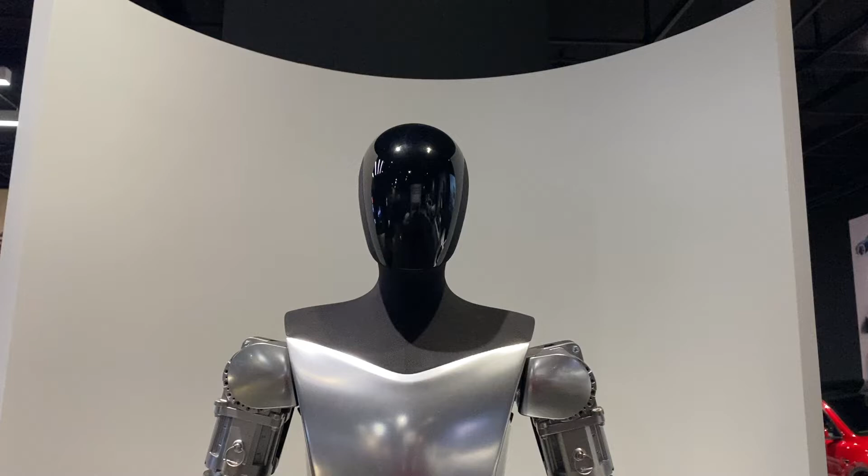When will they join the workforce, you may ask? Well, Elon has a lot to share, which will be covered here today for you.

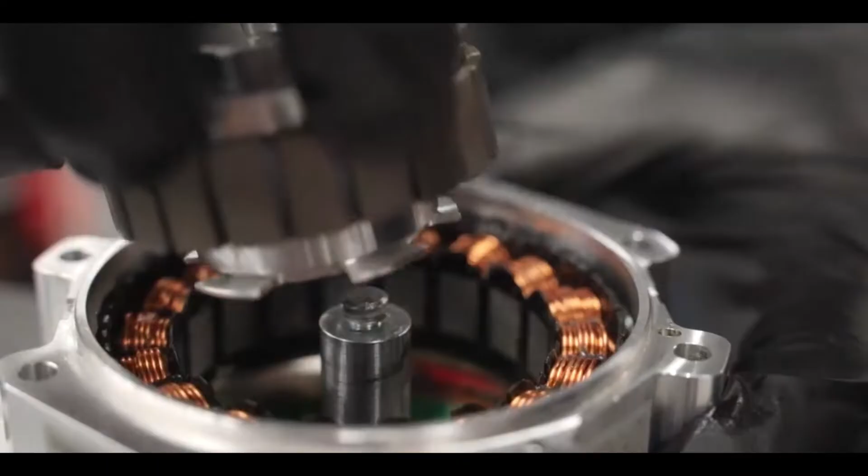Elon Musk was not shy about making bold claims on the capabilities of his Tesla bot humanoid robot. Chief among them being his belief that an economy driven by work droids will make possible a future with no poverty, a world of abundance where everyone can have everything they want in terms of products and services. This was to be a fundamental transformation of civilization, similar to the internet boom and later the 4-hour work week craze coined by Tim Ferriss. I think we can all agree that would be a change in a positive direction.

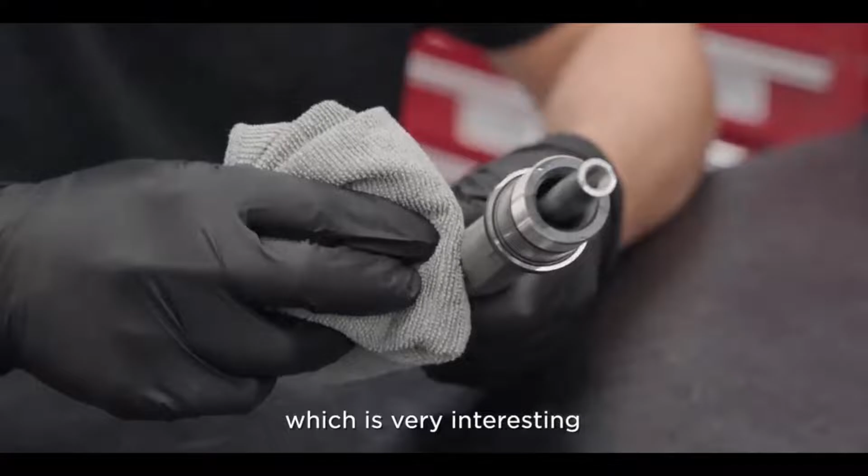The basic theory underlying this idea is that the size of the economy is determined by the number of productive entities multiplied by their productivity—more robots, more workers that don't need to rest, just a plug. So in order for the economy to grow perpetually, it would require equivalent growth in productivity and reproduction that robots don't suffer from. Elon's thought is if productivity is limitless, then the economy, by extension, will be as well. That sounds like wishful thinking, and it is, but Tesla is starting on the path toward that goal regardless.

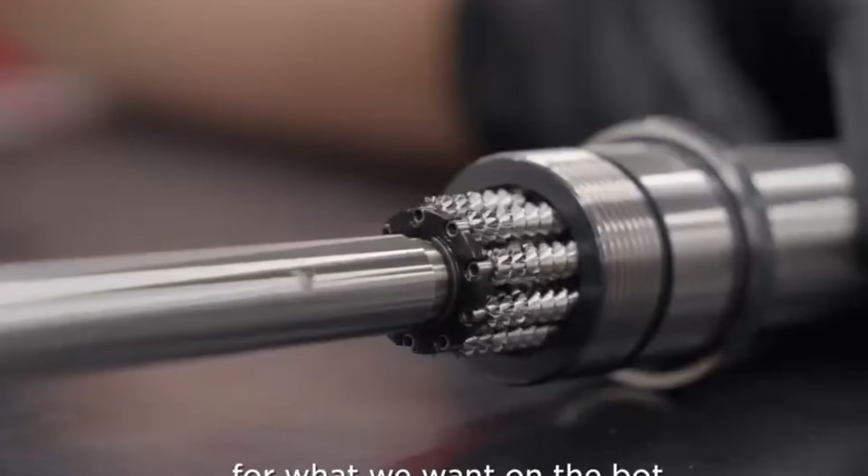So let's talk about how the Tesla bot is going to accomplish the most ambitious plan in history: adding humanoid robots to the workforce.

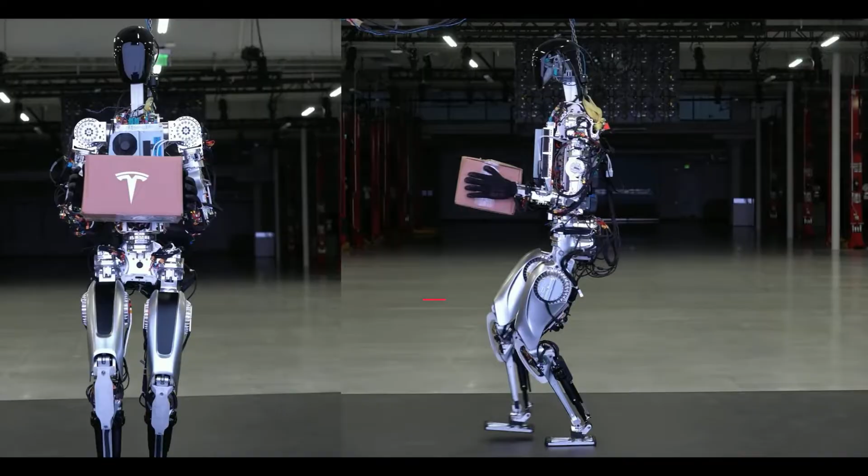Tesla AI Day 2022 brought us our first look at the functional Tesla bot—well, 2 of them really, or like 1.5. We did see a robot walk across the stage and do a little dance, but it was kind of janky looking. Tesla confirmed that this is simply their test candidate. They built a functional humanoid shaped robot with commonly available parts as quickly as possible so they would have a vehicle to start developing and testing their software.

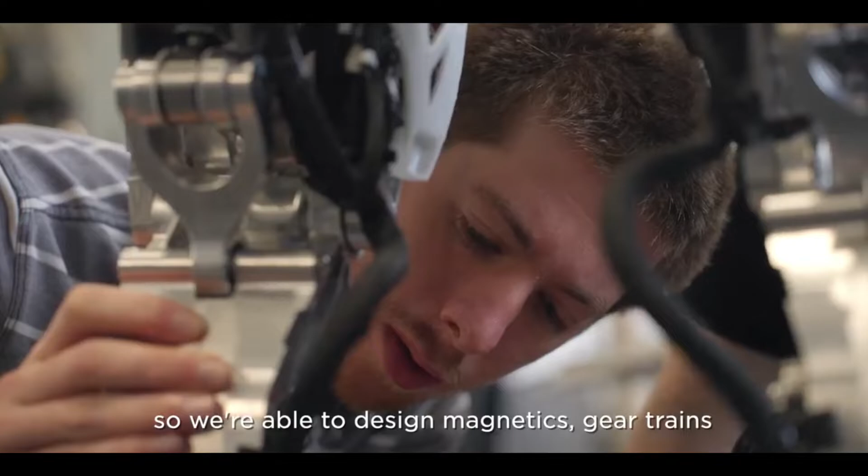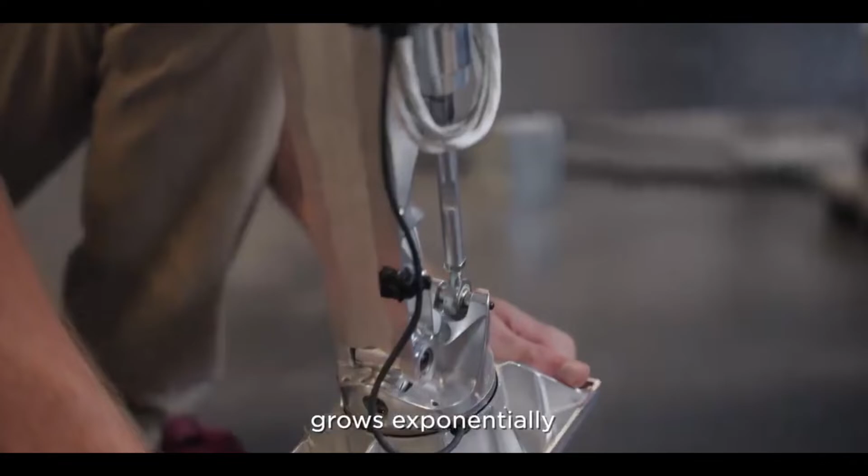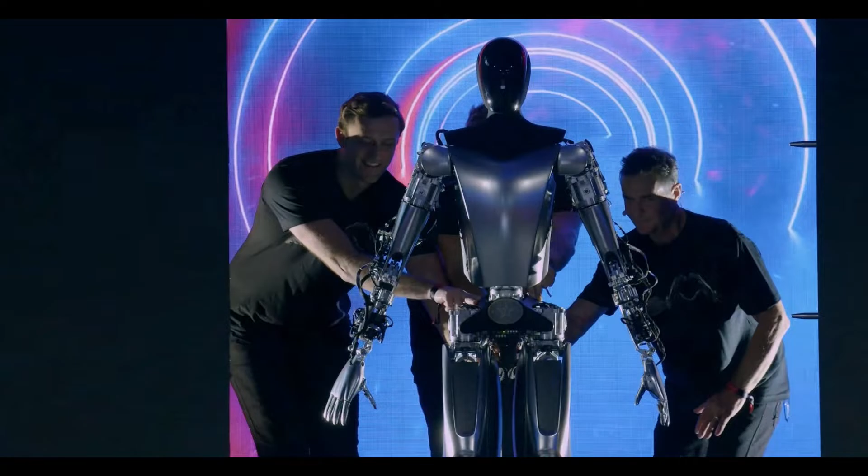The first prototype was nicknamed Bumble C, another Transformers reference, and an admission that this is not even a B-grade robot—it's a firm C. But this gives them something to work with while they put their efforts into the real deal. We do get a taste of the real Optimus at AI Day. It couldn't walk or barely even stand on its own, and it had very limited movement, but this one looked a lot better, and Elon confirmed it is pretty close to what the first production robot will look like.

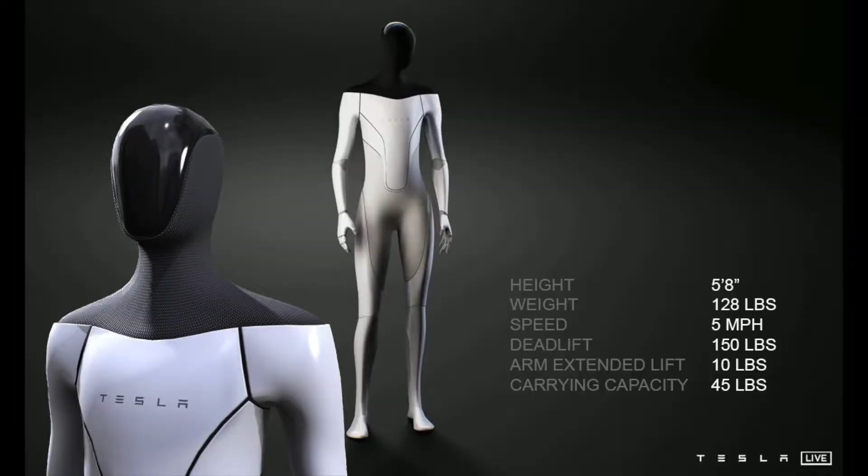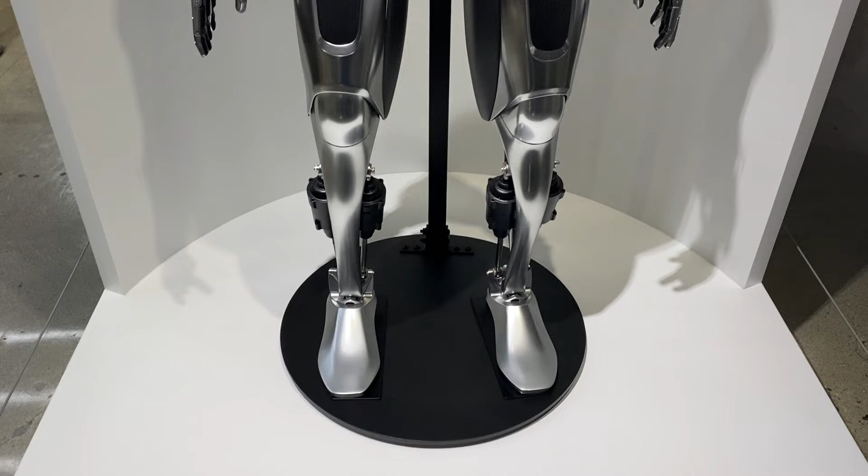The ultra slim design from the very first AI concept is gone, which was jokingly revealed in 2021 while everyone was still trying to get a grip on COVID-19's impact on the world. This new Optimus is chunky, and that's perfectly fine. It also seems unlikely that Tesla would fit a functional robot into such a slim frame. I think with the first robot concept, they were trying to stress the fact that this was not supposed to be dangerous or intimidating. Every aspect of the Tesla bot is designed for optimized cost and efficiency.

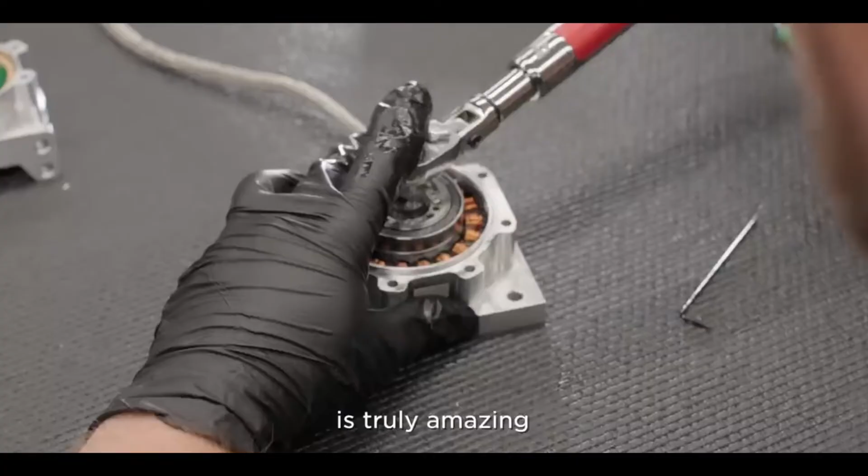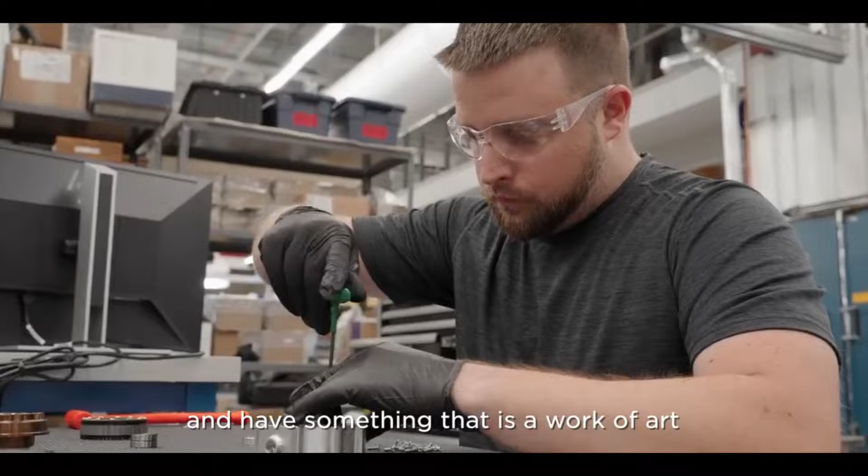This means reducing the part count and power consumption down to its bare minimum. The power source for the bot is a 2.3 kilowatt-hour Tesla battery pack, enough energy for a full day of activity. This is a fully integrated battery unit, so power distribution, cooling, and battery management are all integrated into the pack. This keeps the bulk of the weight right in the middle of the robot. Tesla is leveraging their existing products and supply chain to build this miniature battery pack.

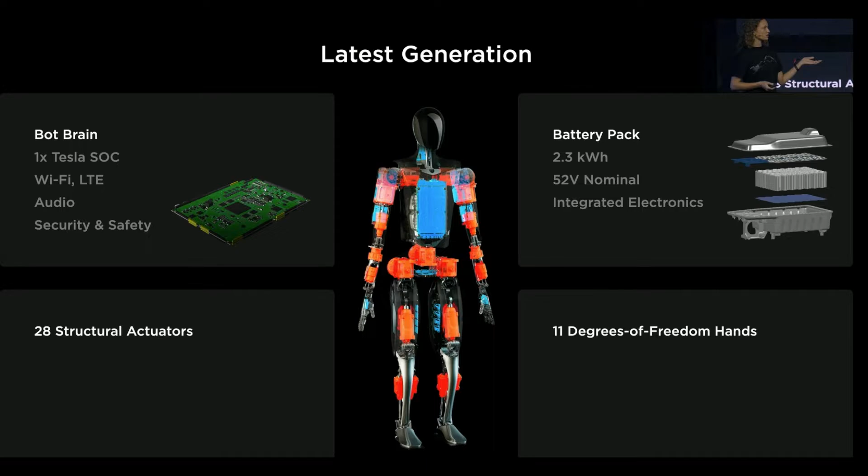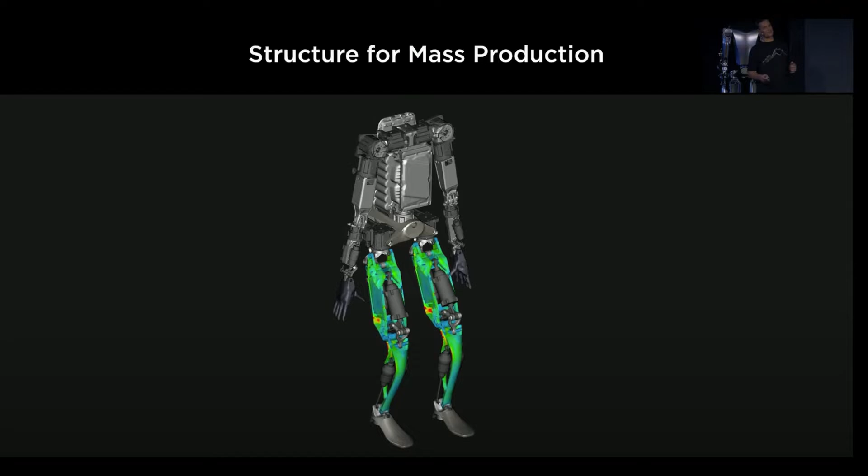The central computer is also located in the torso. The brain is in the chest, not the head, and again, that's to centralize the weight. This is powered by Tesla's FSD computer, the same one as in every Tesla vehicle, with a few minor changes to the form factor and functionality. But this computer is already designed to do everything that a humanoid brain does—that's how it drives a car, processing vision data and making split-second decisions based on multiple sensor inputs.

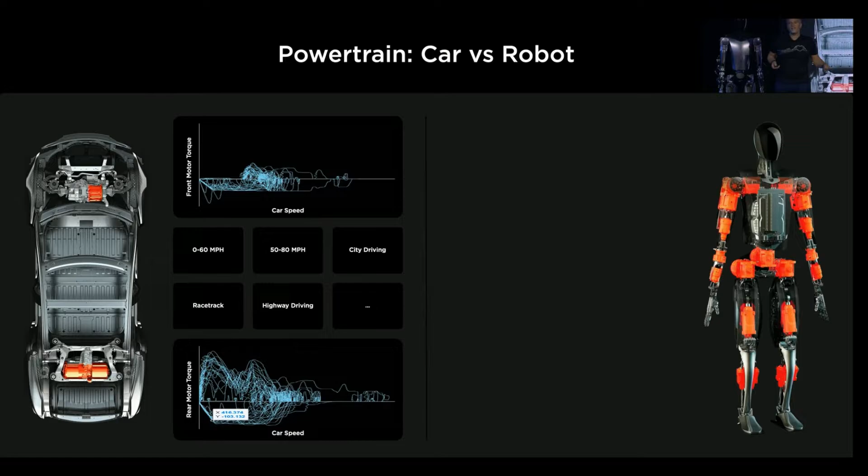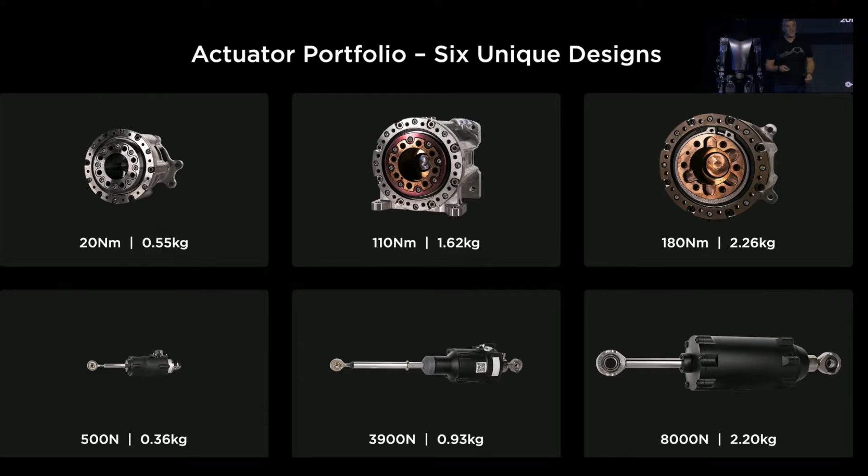This updated bot design used 28 structural actuators, actually down from the original concept last year that had an estimated 40 actuators. Most of the movements were simply inspired by the human body, with emphasis on creating a design that is intuitive and easily programmable.

Now, the electrifying question is, will Optimus do any work in the factory in 2023? That can be answered by 3 letters Scott Walter said while mentioning the Tesla bot's future, and that is FSD.

Scott Walter is an aerospace engineer with a PhD in mechanical engineering. He co-founded Deneb Robotics, a pioneer in the early days of robot work cell layout, planning robot simulation, and robot offline programming. Scott has worked on projects for NASA and aerospace, just to name a few. Let's see what he said in this interview as to when the Tesla bot will start in the workforce.

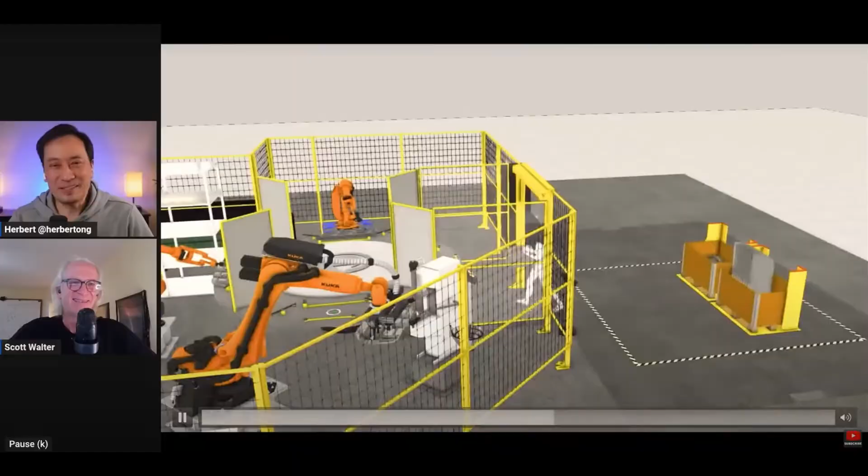You told me that you believe today that by the end of this year, there's going to be 500 Tesla bots, and that they're already going to be starting in the factory. This is completely opposite of what many people have been saying, that it's going to take years—don't expect it to be a business that's available right away. Why do you believe this?

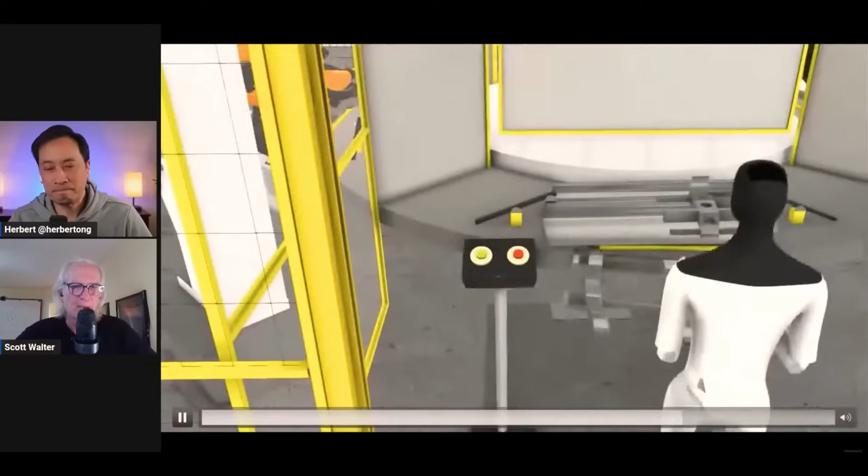I'll use just 3 letters: FSD. We know how FSD works—it's the fleet, it's the mileage, right? You need the data. And in order for Optimus to be able to progress, you need a lot of data. You just can't have one Optimus.

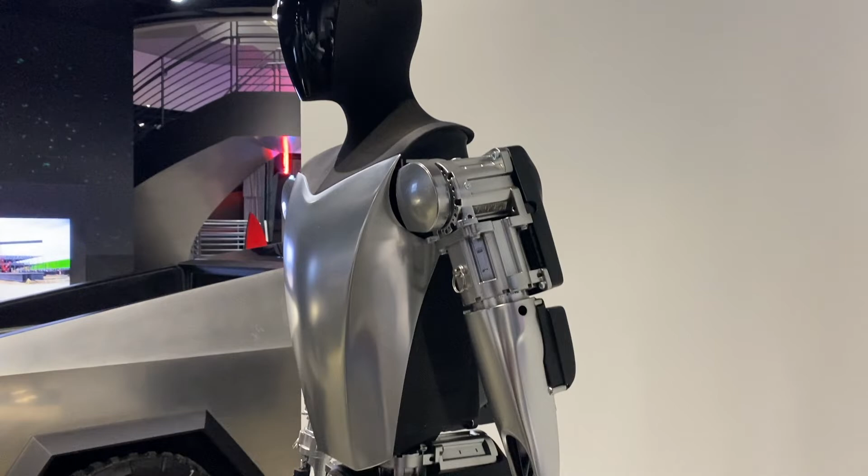So the question is, how does all of this work? Will all of the moving joints, wrist, and hand movements all work together seamlessly? Well, Tesla spent a lot of time designing the robot. Even if we look at the hands and wrist motions, we see a lot. Notice the points that were shared by Scott in the interview again. I do a close-up in there to look at it.

You see, you have these 2 drive units or like pistons that are coming out. And you notice how it's kind of askew a little bit? That was kind of the clue to tell me how that was going to work. It's an ingenious mechanism that they have.

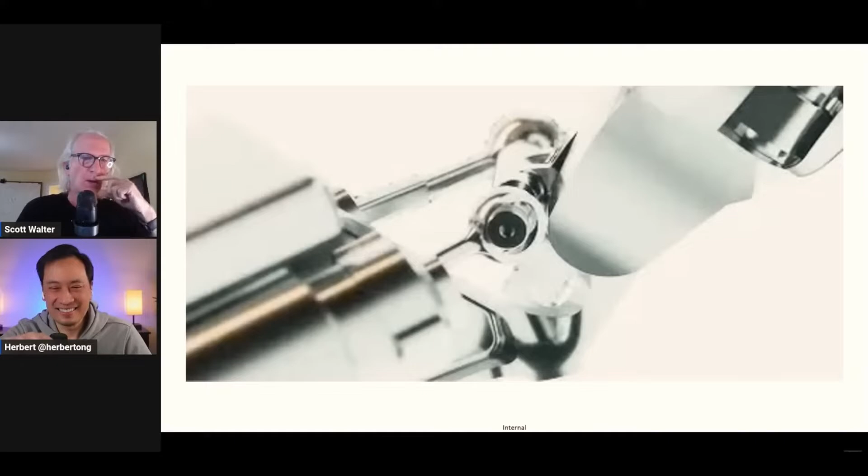So we jump ahead to the next slide, and that's where I put together what was going on. I took that slide from the first AI day, turned it around and looked at it really closely, because they had this skeleton in there that you weren't sure—was that just a graphic artist having a lot of liberties? It turns out, no. They really thought this through. It wasn't something that they just put up there. It's way more than a PowerPoint. They clearly knew what they were doing, and there was a lot of information in there.

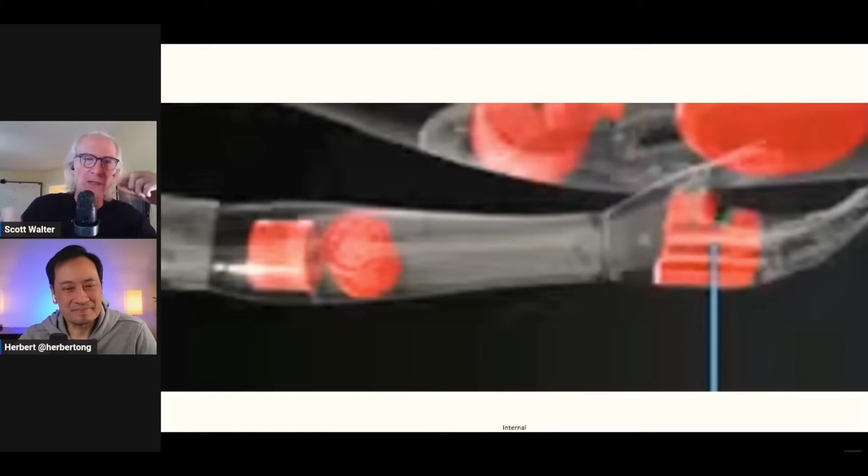And I keep having to go back to realize that they gave me another breadcrumb that I missed. So here you can kind of see, and I highlighted in the next slide, that there are these 2 connecting rods, and what appears to be those 2 servos that rotate. And you might wonder, well, how does that work?

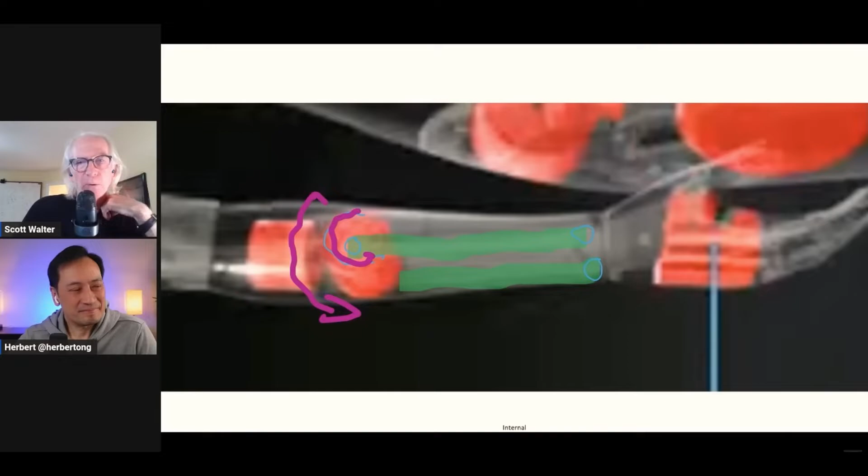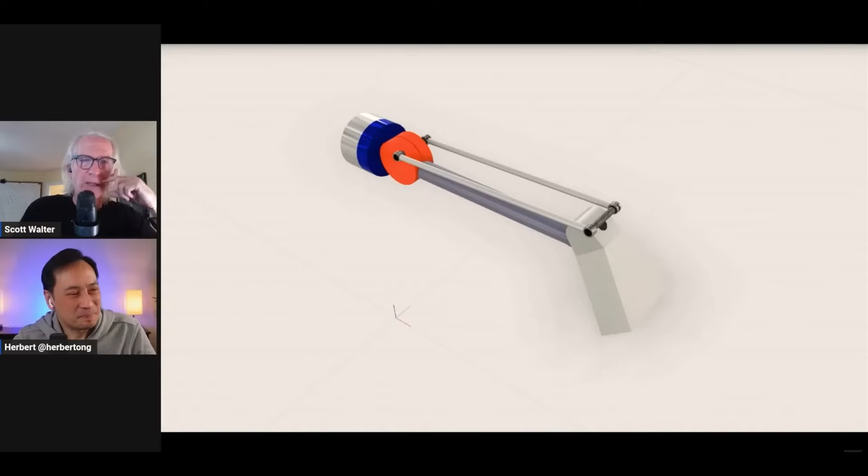Then I show it in the next one, where I made a little video to show how the mechanism works. So now, as we run this video, you're going to see how we get that pitch motion. The blue is doing the roll—that's like opening and closing your door. And when the red motors move together, you get the pitching motion of your wrist going up and down. When they go the opposite direction, you get the yawing, and you can do a combination of the 2 to get that to work.

Now that's what they call a parallel mechanism, and that is ingenious, because a lot of times people make things as a serial joint, and it gets really hard to throw in the yaw. Most people will say, is it worth that yaw because the mechanism gets too complicated?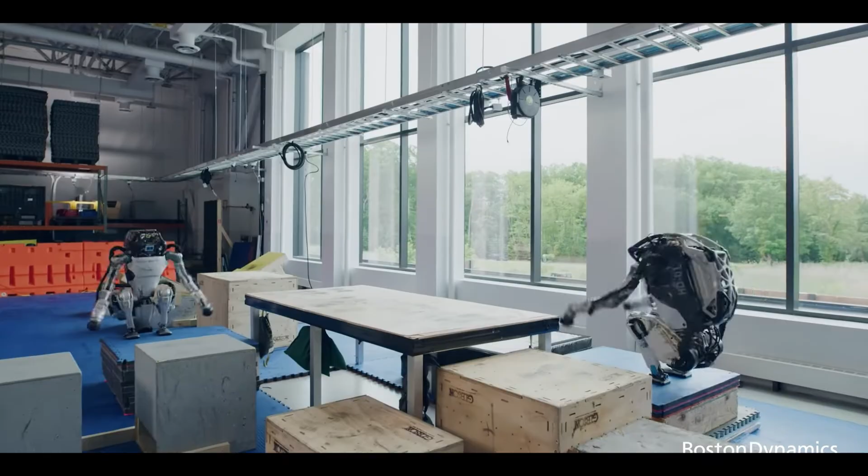So we see the history of this robot is really giving us a glimpse of what the future will hold in regards to Tesla trying to take over the robot manufacturing industry.

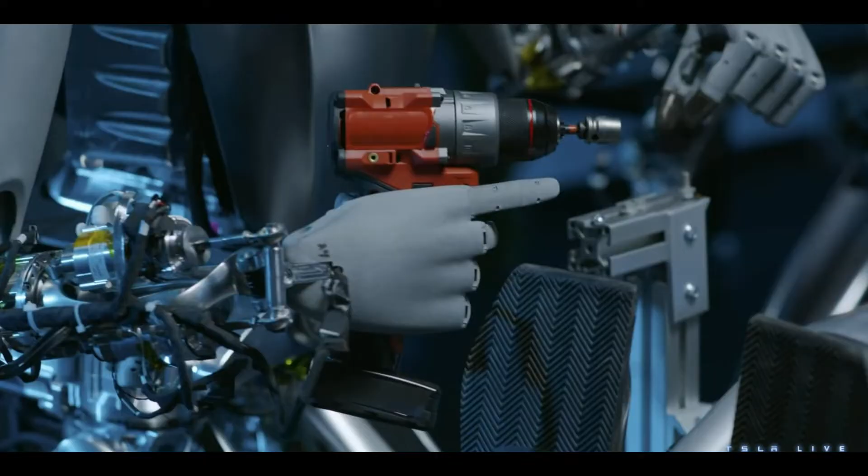So from the Bumble C to a particularly impressive 6 months later, the Optimus—not only can the same bot that had to be carried onto the stage walk, but it can also pick up stuff with fully humanoid 5-finger hands included. High precision movement, like pinching a nut between 2 fingers and then fastening it with the electric wrench. It's not doing parkour or anything crazy, but it is using tools, and realistically, it's even more fascinating and impressive for a robot to do.

Tesla just showed us a real-world case of a humanoid robot—a machine-building machine. Elon points out that the difference between the Tesla bot and all the other androids we've seen before is the brain and the artificial intelligence driving these robots.

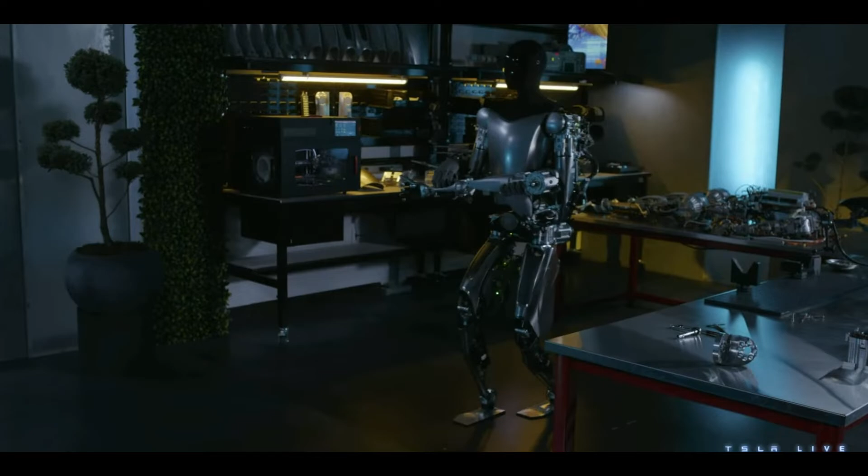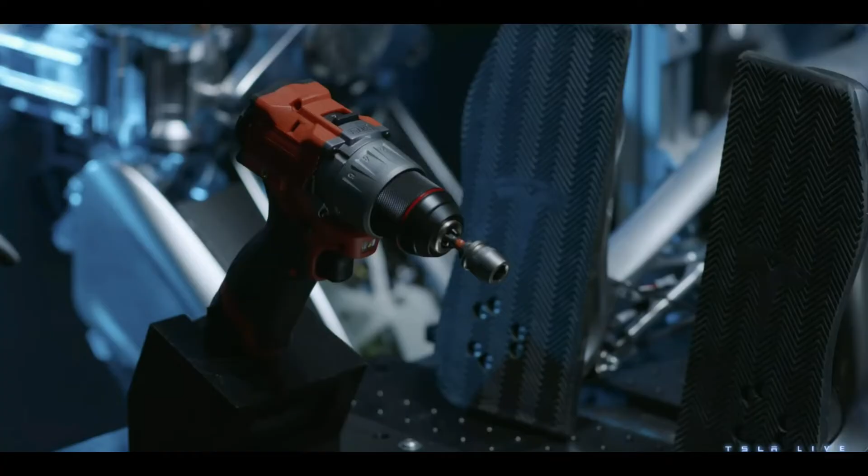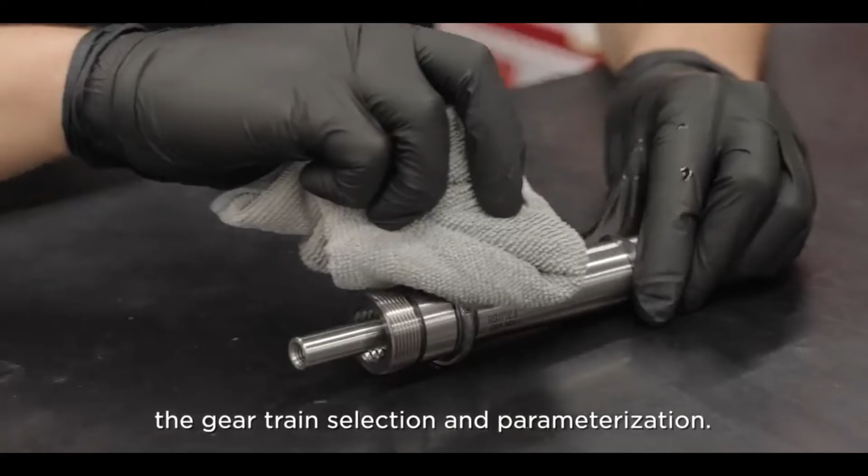Tesla is a global leader in real-world artificial intelligence. They've made a computer brain that can drive a car, which you can essentially think of as a robot on wheels. They're just cutting and pasting that same technology to a robot on legs, because it's not really that helpful to have a humanoid robot if you need to program each and every action it needs to take. You'll be limited to a bunch of predefined movements, or you need to be a coding expert to actually make good use of the bot.

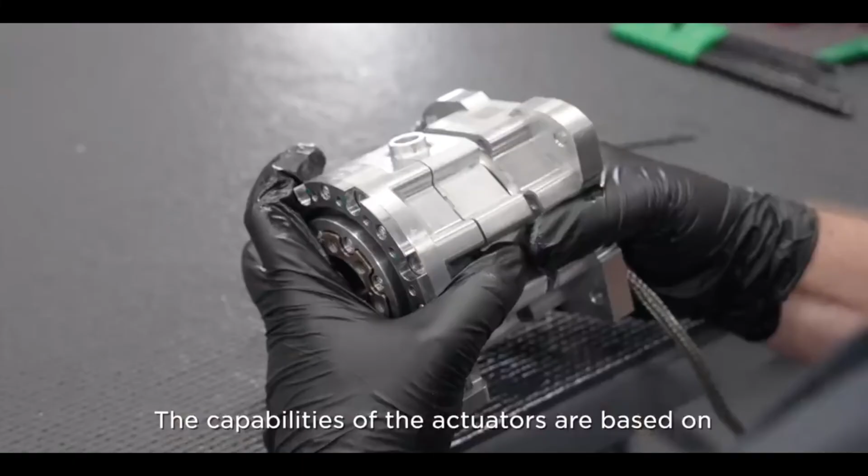In Elon's mind, you can just give the Tesla bot simple instructions, either showing it what to do or telling the robot what you need, and it will solve the problem autonomously.

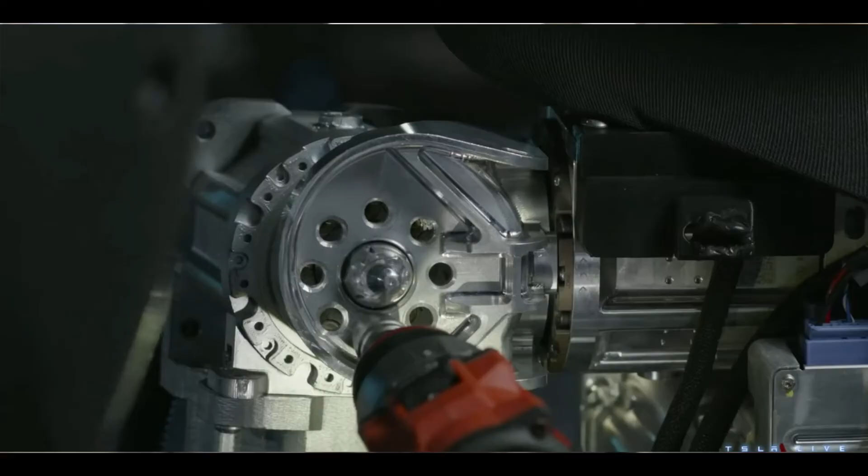The other difference maker is that Tesla bots will be built at the scale of manufacturing. Elon says Tesla has already vertically integrated the design of their current Optimus prototype. Every robot actuator was designed by Tesla's own powertrain engineering team—the same people who built the Model S motor, computer electronics, and battery system for all Tesla designs.

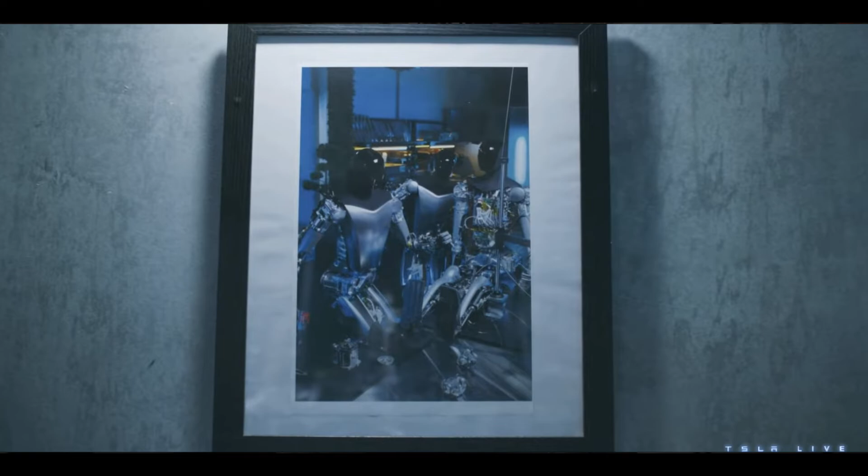Once they start building these things, they are planning to build a humongous amount of robots. They could have many of them working on Tesla vehicles, as we saw in our prior video. So you never know if your vehicle could have been built in some portions by one of the Tesla bots. It's a big novelty, but Elon is talking about a future where the number of robots is greater than the number of human beings.

And the reason Elon believes this is because the more Tesla bots he builds, the more capacity he will have to build additional Tesla bots.

That little scene of the Tesla bot attaching the arm onto another was just a tech demo. It was literally putting it right out there in the open. When you look at Tesla bots, you are looking at the future of Tesla's workforce. To be continued.